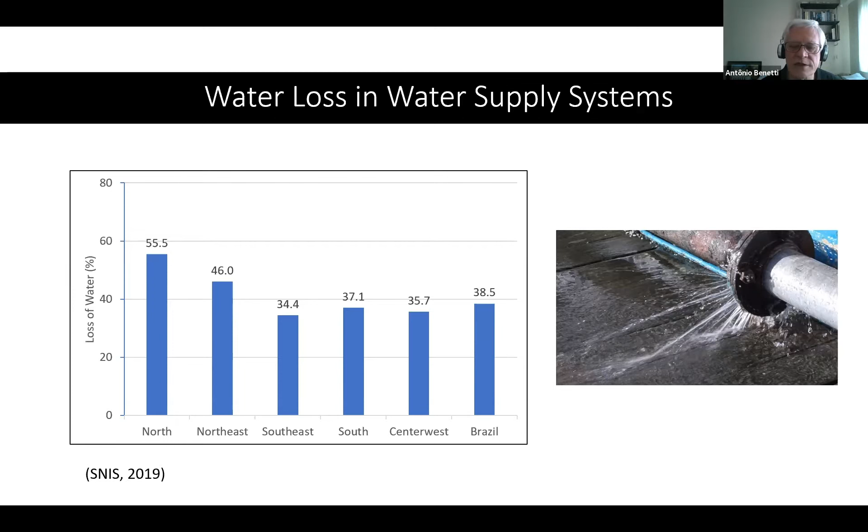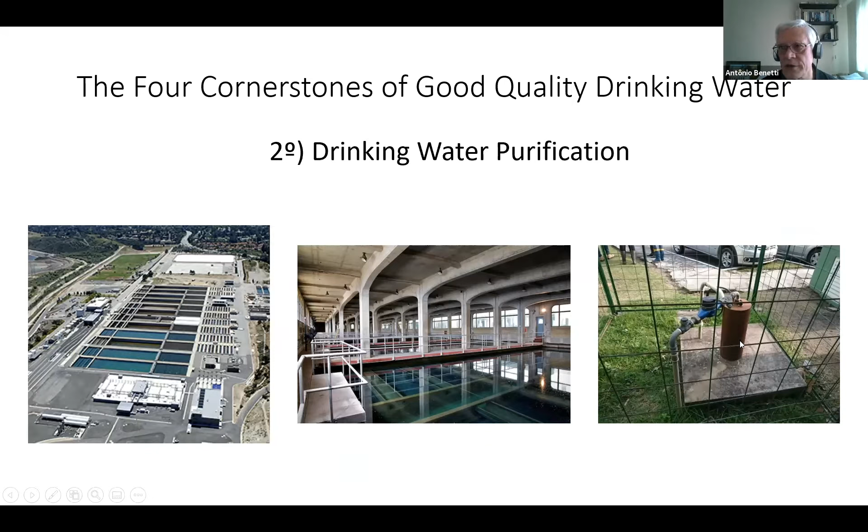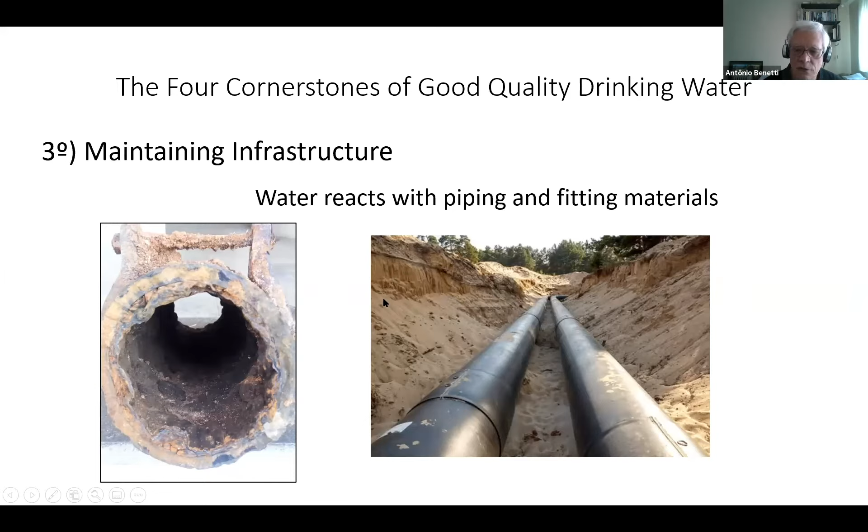The third cornerstone is maintaining infrastructure. Water is the universal solvent, so it reacts with everything, including piping and fitting materials. Sometimes it can make pipes like this with a lot of corrosion and biofilms, so maintenance is very important.

The last cornerstone is inside households. Sometimes water gets polluted inside the buildings. This is a pipe from inside a building, and this is a water reservoir inside a building without a lid and corroded.

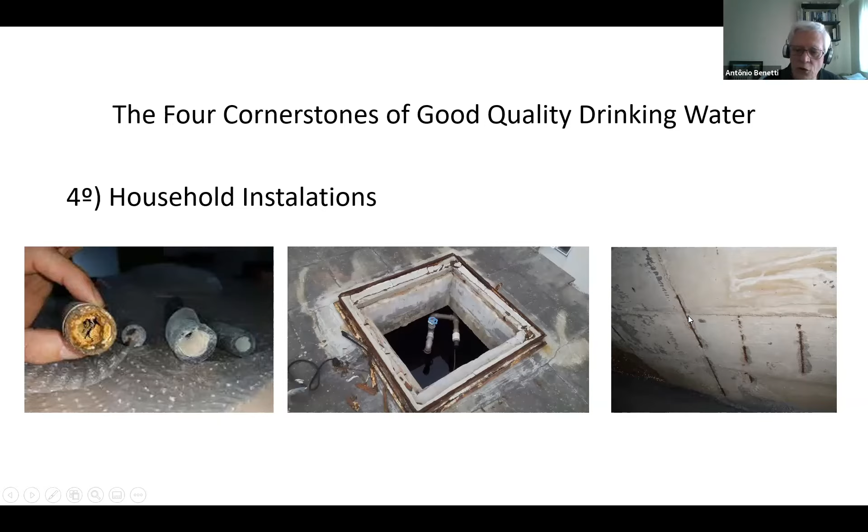So let me talk about the future of water treatment in the public sector. So I think we have these international directions, the United Nations Resolution 64/292, which says that safe drinking water is a human right. So everyone has a right to have safe drinking water, to enjoy fully his or her life without diseases.

And also, as an international direction, the United Nations Sustainable Development Goals, goal 6, clean water and sanitation for all. And in Brazil and for other countries, this safe drinking water for all is related to other goals like sanitation for all, which is related to better water quality. Also, we need more efficient water use. I mentioned the example of water loss. Integrated water management, we need to protect the water sources. Healthier ecosystems, because it's related to our own health, and also international cooperation and local participation.

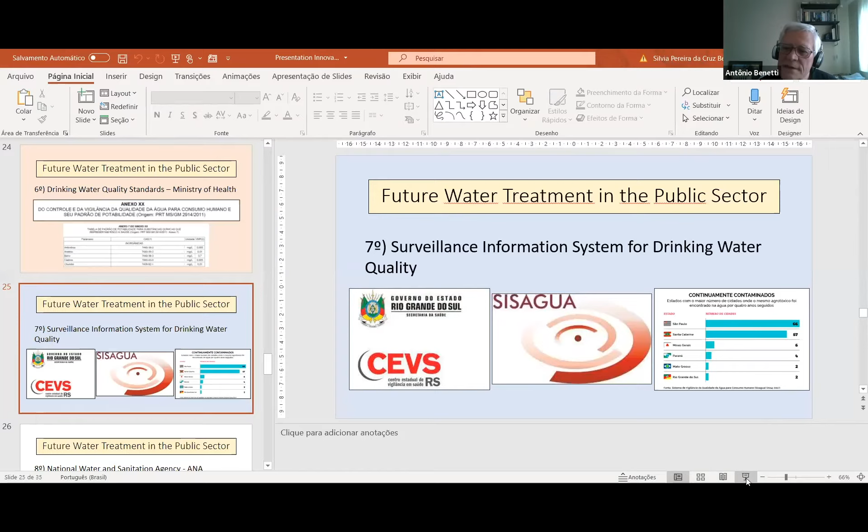Okay, so we have the surveillance information system for drinking water, which is a database. We have this water law, a regulatory agency with competence to define reference standards. And the major challenges for the future: bring water to 35 million Brazilians without access to it. Improve drinking water quality in rural areas. Keep consumers confident in the quality of drinking water, otherwise they will start using bottled water.

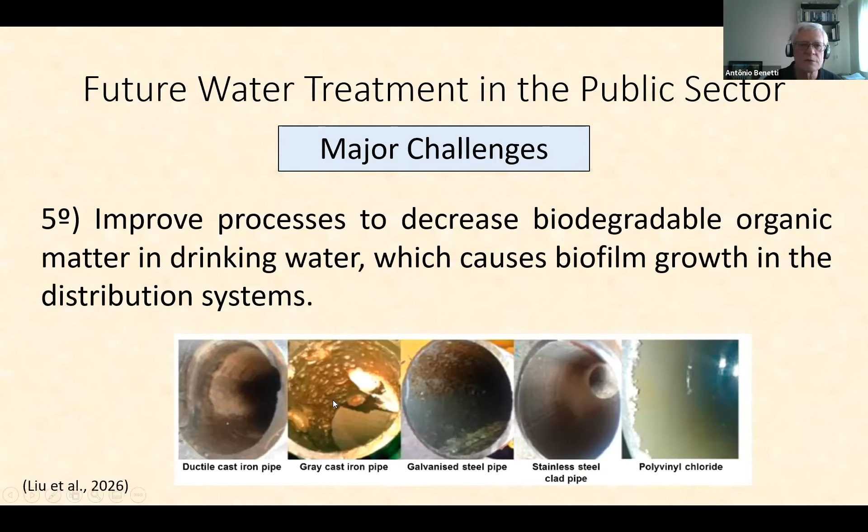Apply technologies to remove pollutants that are not removed by conventional treatment, such as taste and odor, toxins, and pesticides. Improve processes to decrease biodegradable organic matter in drinking water, which causes biofilm growth in the distribution systems, like this biofilm growth. Minimize water shortage, intermittence, and outage in water supply, because it affects drinking water quality.

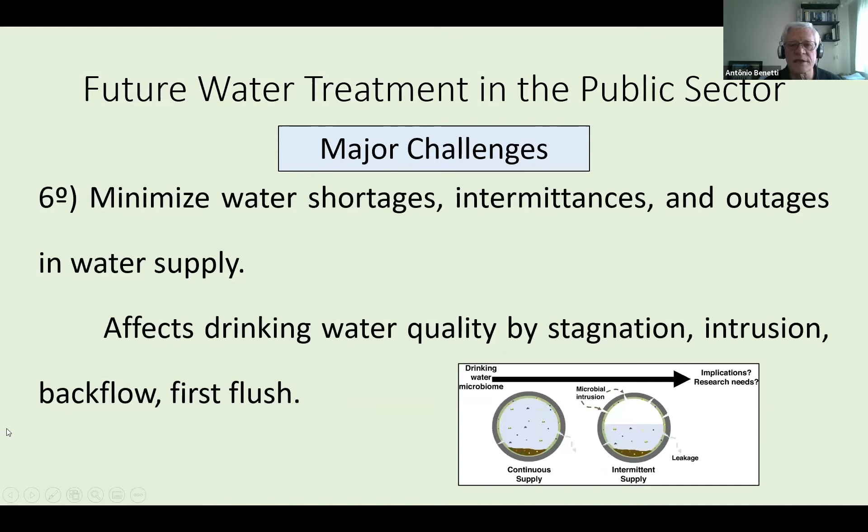Improve efficiency to compete with private providers and adapt to climate change, which will bring floods, droughts, salinity intrusion, increased organic matter, algal blooms. And these are the impacts of global warming. So I thank you for your attention.

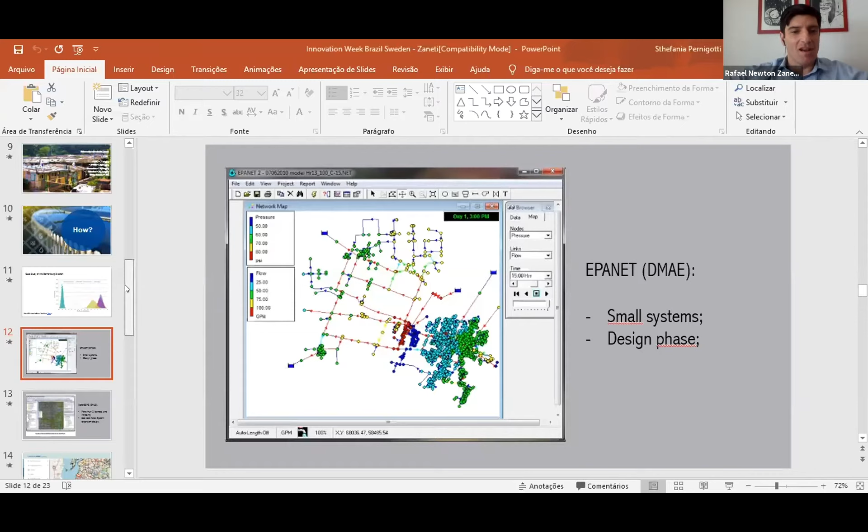So thank you, Kenneth. And I will try my English too, as Antonio. I've already shared my screen. Are you seeing my screen? Is it okay? It is okay. We can see your screen excellently. If you could also give it full screen. Yes, that one. Okay. Thank you.

But how to progress in this vision? How to increase population trust in tap water while qualifying distribution management and diminishing losses? Looking at this case study in the city of Gothenburg, Sweden, it gets clear that implementing district metered areas and using district flow meters, for example, dividing the city into metering zones to limit the size of the area that needs to be scanned actively by workers, is more suitable than replacing pipes.

Then extending leak detection efforts by increasing the number of acoustic loggers that can detect leak noise and send messages to a control center. And establishing these district metered areas with flow meters is almost the same in sustainability, mainly economic, as increasing the personnel working force for traditional leak detection methods, I mean, manual listening sticks and acoustic correlators.

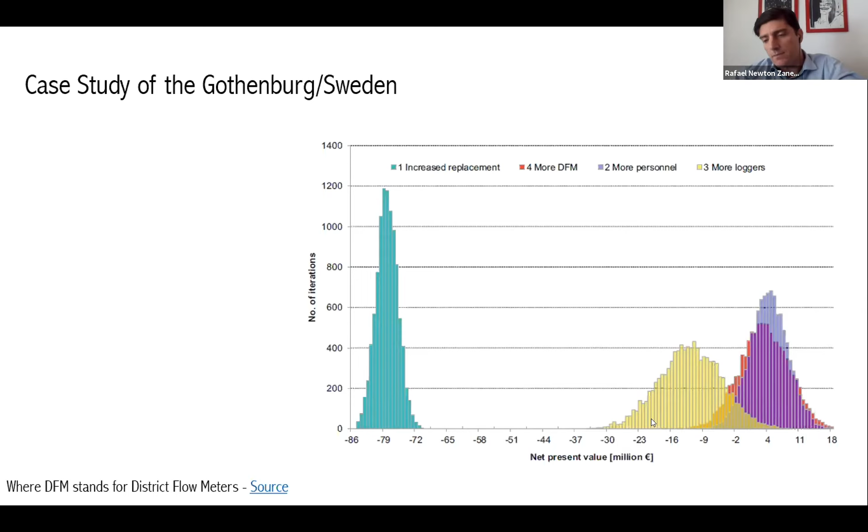But the important thing here is that district metered areas are an important step towards accurate hydraulic and quality models for drinking water systems. And this is what we need to be interested in. In Brazil, there is a technical culture of modeling distribution networks. Being free, for example, and having a Portuguese version, EPANET software is widespread and applied.

Most used nowadays, for example, in the DMAE, it's for small systems, pipe replacement design and checking in the design phase. Although EPANET has the functionality of modeling water quality, by now in Brazil this is not normally applied.

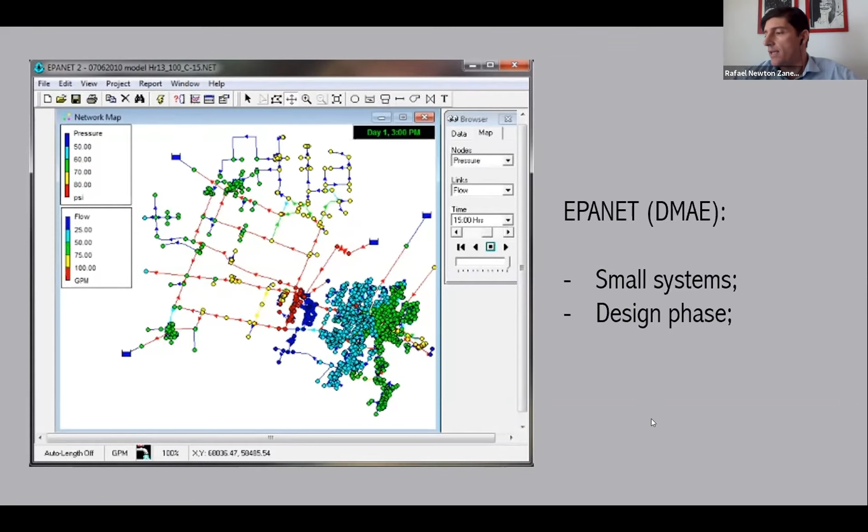Among others, WaterGEMS, a software from the Bentley Systems company, has a Portuguese version too. Being a commercial software, it has tools for calibration and an easier interface with SCADA automation systems, for example, enhancing the real-time control and operation applications of this kind of model. They might have some licenses of WaterGEMS.

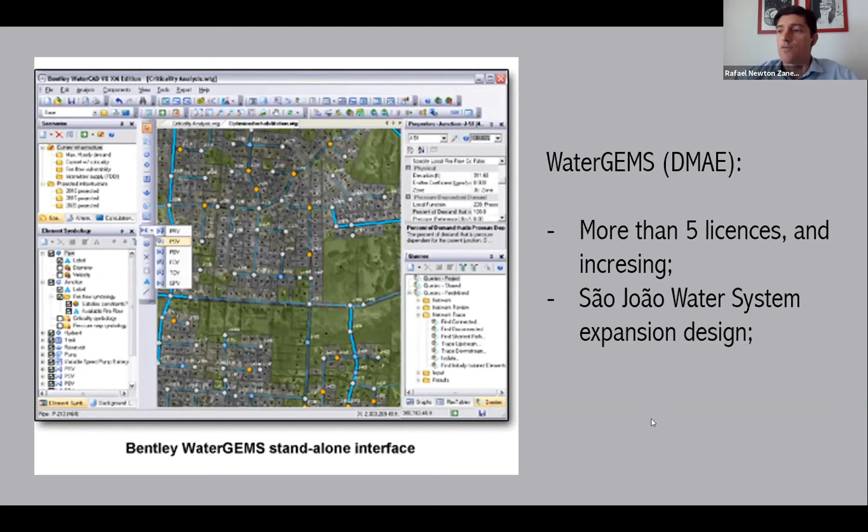By now, its usage is rising, and at least the expansion design of an important water system within Porto Alegre, the São João water system, was run using this software.

Another important comment is that the GIS culture is widespread within water and sanitation operations in Brazil. Of course, medium to large cities are in the forefront of this transformation. The DMAE has a well-designed GIS dataset; water system information such as consumption and pipe information, nodes, and others are all available and up to date in this GIS system.

Moreover, the whole municipality, or the other urban services, has a well-constructed GIS dataset too, and all this information is integrated and up to date.

One other innovation that the DMAE is struggling to bring to Brazil, as mentioned as a need by Professor Benetti, is the idea of advanced water treatment. In this sense, last year the Porto Alegre Wonder Water Project was launched by the DMAE. It is a project that brings together the DMAE and the Federal University, represented here today by Professor Benetti.

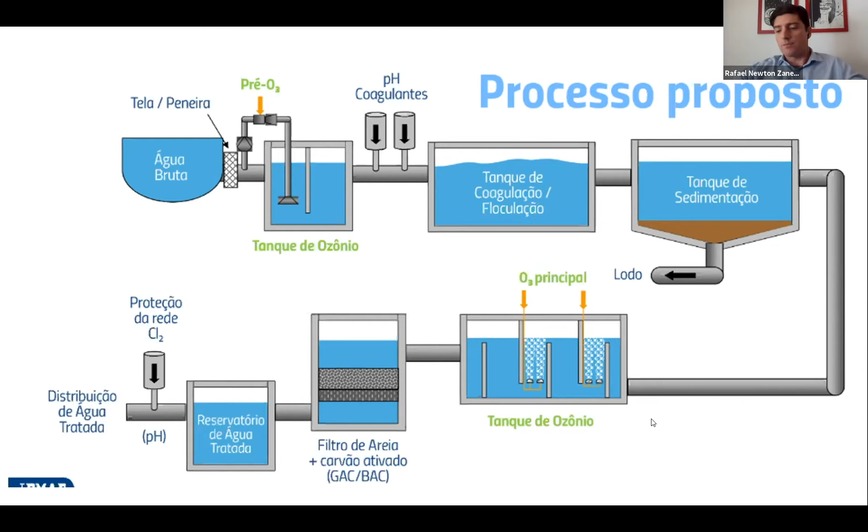Therefore, distributing a more biostable water, that we know you guys in Europe have done for a long time now, with less chlorine demand and less biofilm building within the distribution pipes. Today, the DMAE does face turbidity increase in distributed water after pipe burst repairing, for example, making trouble for the clients and for us, the operator.

The social impact that we look for with this project: we believe that once the advanced treatment gets implemented, the trust in tap water will rise. And this will be good, it's a kind of circular economy, for the city, for the environment, and for the people. And it is important to notice too that initial evaluations show that not a huge water price impact will be implied with the implementation of this advanced treatment. Perhaps it will not even happen in a less water losses in distribution scenario.

A pilot plant is to be rented. This is the plan now, following a bid, including conventional and advanced treatment equipment and operation. The DMAE is looking for a strong industrial partner to deliver this equipment in a rental way. The university, again represented here by Professor Benetti, is to set the experimental planning and critically analyze the results of the tests. To the best of my knowledge, the funding for this project is written into the municipality budget bill for the 2021-2023 period.

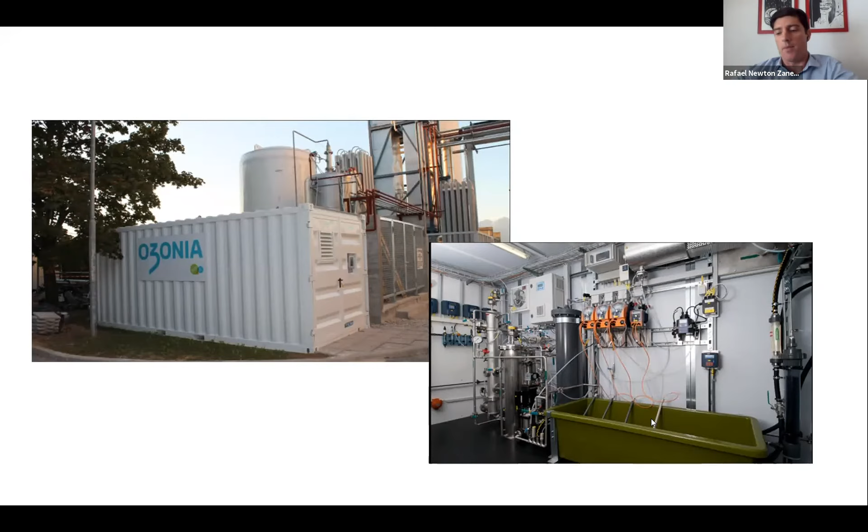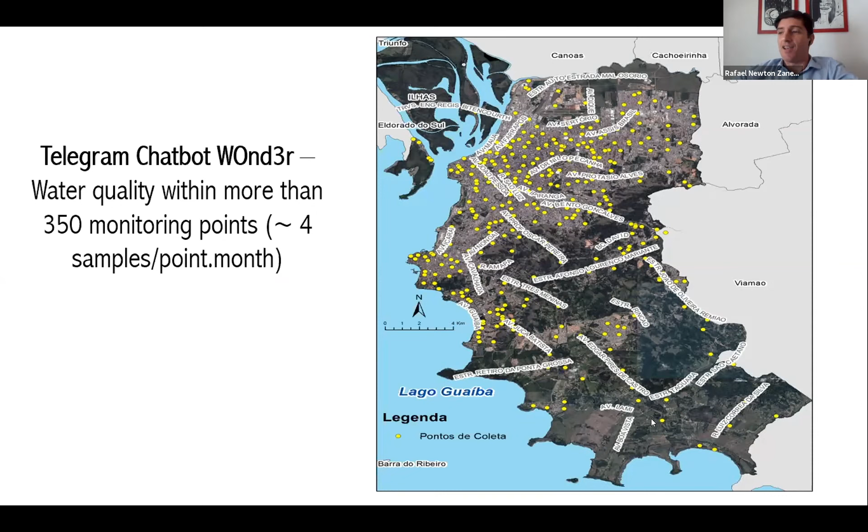But what are the needs for this vision of mine to concretize? We need DMA and DFM infrastructure development. I mean, today the level of water connections within district metering areas is not enough in Porto Alegre. As I said, Campinas has a better infrastructure in this sense, and Porto Alegre and most of the cities in Brazil do not have this infrastructure, so we need to do it. And the DMAE is looking for it with will. And another need is know-how.

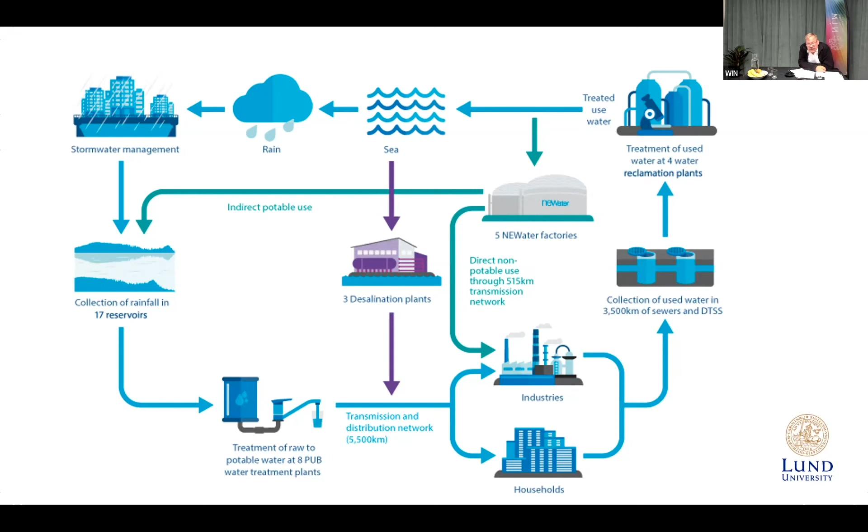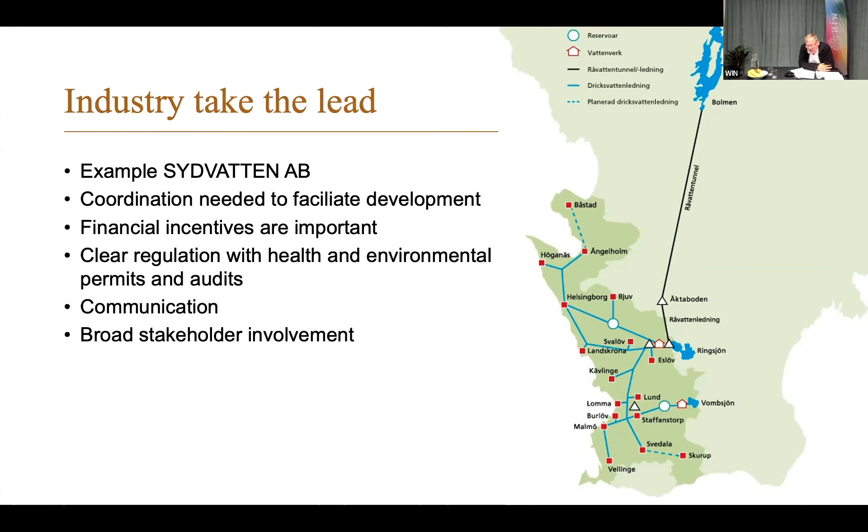Sydvatten has produced a strong strategic paper about drinking water supply challenges in a changing climate. It was presented in 2014, and it presents the urgent need for regional planning to meet water demands on a regional level. It's not enough for small municipalities themselves; they need to collaborate. There's a substantial need for improved monitoring of water quality and quantity, and a need to protect and secure water resources and water treatment plants, making sure their function and electricity supply are in place. There's a clear need for higher flexibility and stronger preparedness to meet the changes climate change causes to water quality and quantity.

It's also about meeting and talking with customers on the demand side. What water amounts do customers actually need, and what can be done to reduce their demands by offering smarter solutions for them? Investments and maintenance are central—we're working in an infrastructure area and need to take care of the infrastructure used to supply the water. It's also about water safety, public relations information campaigns, and of course, which I'm very fond of, more research and development innovation work.